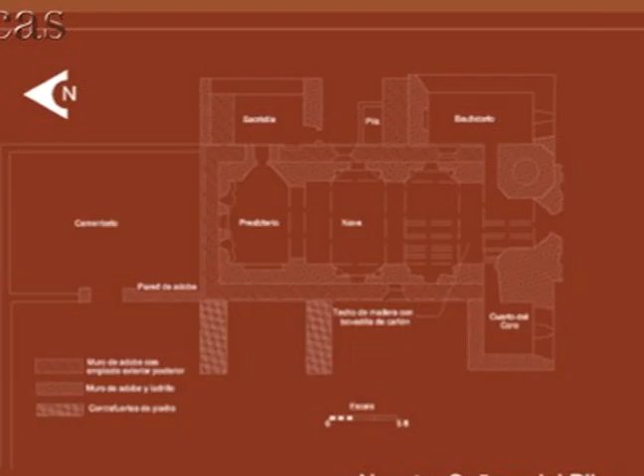Yo estuve leyendo mucho los informes de Jake Ivey en sus dos ediciones. La primera tenía una idea más o menos de lo que era la iglesia, de donde salió el dibujo que estábamos viendo anteriormente, y después la segunda versión que él me dio para que yo fuera viendo las etapas que habían identificado en campo ellos.

And so Abby took a good look at the work that Jake Ivey had been doing in order to understand how the building had different phases, looking at the work he had done on how the temple was in one moment.

Esto es un detalle del sistema constructivo que se hizo en la expedición de 1934, y nosotros lo cotejamos con las fotografías que obtuvimos del WAC, también en Tucson. Pudimos determinar el sistema constructivo, cómo está hecho con esta bóveda falsa y los vestigios que todavía teníamos en las fotografías. And so you can see here, this is the small diagram made by that expedition in the 30s by the National Park Service.

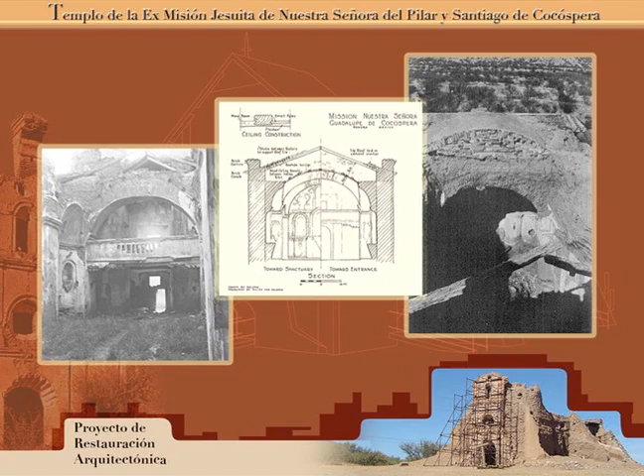And you can see the adobe arch and also the wooden beams. They tell us the size of the beams, and that kind of corroborated this idea of the false vault, barrel vault. And in the early pictures, this is the 1920s pictures, you could still see the wooden beams that held the carrizo, the cane sticks, and then the plaster that would come under it.

Después nos encontramos algunos dibujos de personas que estuvieron visitando Sonora cuando empezó todo este movimiento de Cocóspera, que al principio de los 70 fue muy importante, y algunas reconstrucciones que estos arquitectos hicieron. También estuvimos analizando los dibujos que se habían presentado de cómo podía haber sido la iglesia.

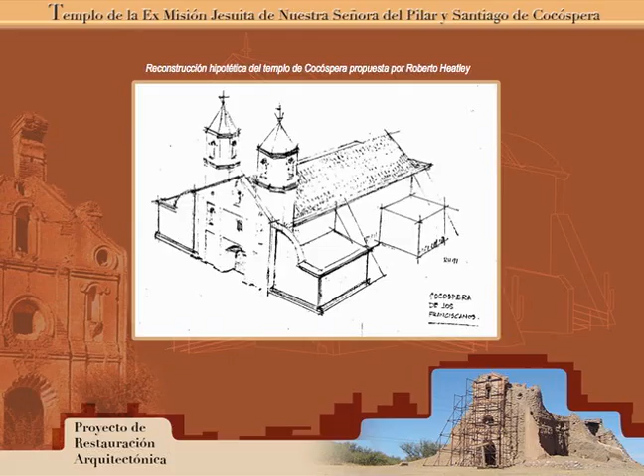We looked at different interpretations that have been made over Cocóspera. This is a small sketch made by Roberto Heatley, how he interprets Cocóspera could have been, let's say, in the late 1800s, beginning of the 1900s.

Bueno, y esto también era parte del trabajo de Jake. Entonces estamos viendo que el edificio, aún en su estado en ruinas, nos estaba arrojando información que a lo mejor teníamos una interpretación diferente, tanto Jake como nosotros, pero sí se aproxima mucho la interpretación que estamos haciendo de cómo podía haber sido la iglesia.

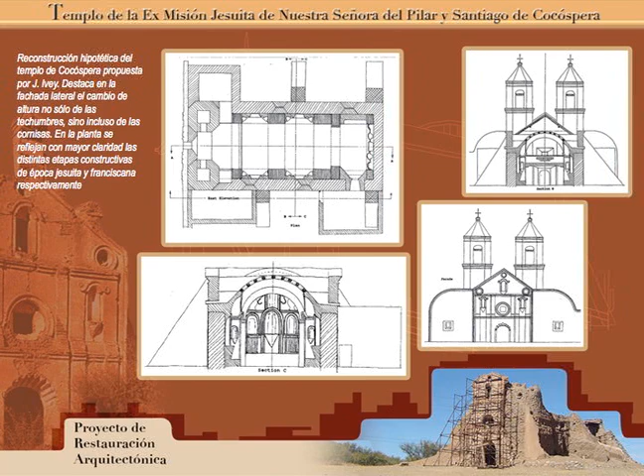Y estos son los dibujos de Jake. So these are the drawings that Ivey has made, and even though we have different interpretations, there are some common details, like the idea of the towers of the first part of the temple that has a gabled roof. This is basically the graphical reconstruction that Ivey has made.

Estos son el corte que plantea Jake con los diferentes niveles de los techos y cómo se vería una fachada lateral. These are the cross sections on one facade, and you can see the different heights of the rooftops, the gabled roof on the choir, this other barrel vault we can still see in the photographs, and the part of the nave. These are the sections of the adobe arches.

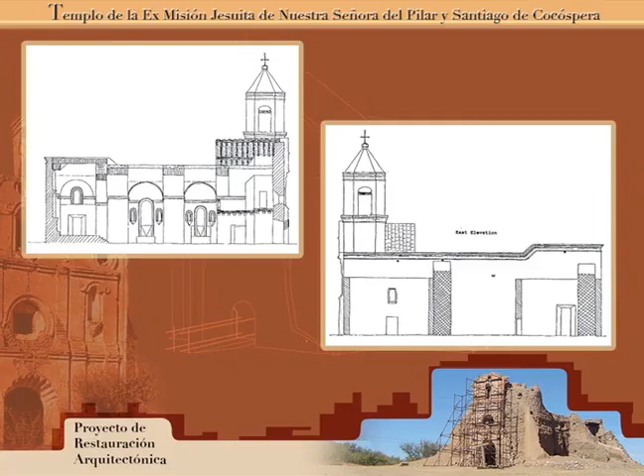Bueno, entonces nosotros también teníamos que, para poder hacer un proyecto de intervención, fundamentar muy bien por qué íbamos a realizar, cómo íbamos a realizar nuestro trabajo. Y lo que me tocó hacer a mí en campo junto con Júpiter y el equipo de arqueología fue hacer un levantamiento de lo que teníamos, de qué nos estaba quedando en la iglesia.

And so Abby had to do the documentation process. She, also with Jupiter, made the topographical survey, and they detailed the measurements of the building and all this. And so this interpretation that Abby and I made was done over the plans they made of Cocóspera, with the real measurements.

Nosotros fuimos a campo, estuvimos viendo dónde hay todavía arranques de columnas, dónde hay vestigios de viga, hasta dónde tenemos las alturas de los muros, dónde podemos ver todavía en el edificio algo que nos dijera cómo estábamos. Entonces, ya después con las medidas, empezamos a trabajar con esta reconstrucción con medidas ya tomadas en campo y un poco también apoyados con los dibujos de Jake.

With the information that we had from Ivey and the real plans made from the topographical survey, and looking at where the arches began, the vestiges that we had of the ruins, we still had the photographs and some of the elements still there—this barrel vault is still what we call the arranque, where it begins. So we had the measurements of many of these elements, and with that we made this graphical reconstruction.

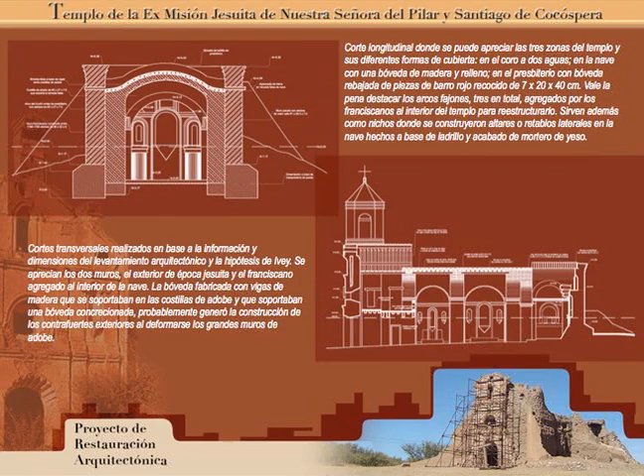Otra parte de la investigación que teníamos que hacer era saber exactamente qué se había propuesto antes, con qué nos estábamos enfrentando, qué había servido, qué no había servido, o qué ideas habían tenido y cuáles eran buenas y malas, y que podíamos adaptar a nuestro proyecto. And well, part of the investigation we made was to look at what had been done in these years.

There had already been different proposals for Cocospera. And well, we tried to analyze what was the good part, what could have been the bad part of these proposals. One of the criteria used is probably the idea to put a roof that does not touch the original structure, the idea being to protect this important ruin.

Una de las propuestas fue, dentro del Centro INAH Sonora se hicieron estas dos propuestas que vamos a ver adelante. La primera es esta, donde se proponía cubrir la ruina con una techumbre exenta, que se soportaría en lugares fuera de la iglesia, con la cubierta sobre los muros sin tocar la iglesia.

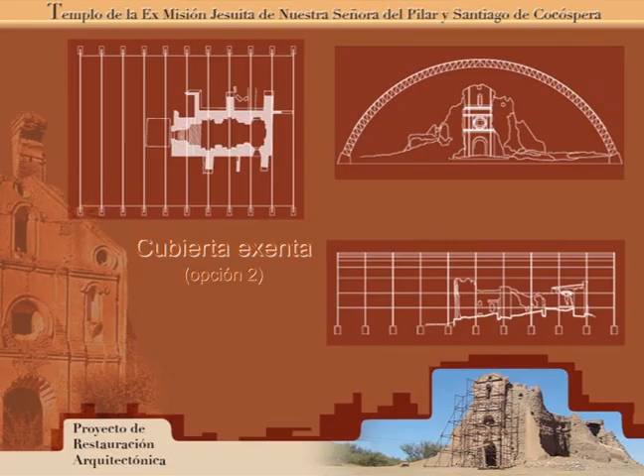Okay. Another proposal criteria was to make a bigger structure that would protect better the ruins of the mission, that would go all the way down this way, so it would protect it in a better way. But still, of course, we're talking about a great big barrel that also has an important impact on the landscape, and still, neither one was talking about what we were going to do with Cocospera on the inside.

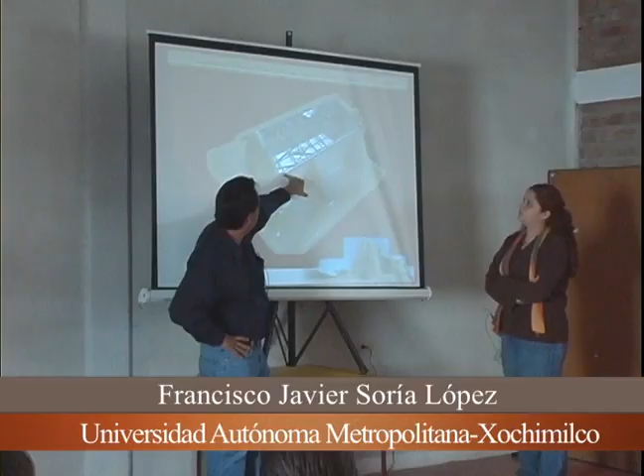The difference with, I insist, the previous proposal that also wanted to put the structure to work is that it was more in a reconstructive criteria. The shelter is resting on the buttresses? Okay. That's something we weren't able to know. Jim was telling us that the idea was that the structure would rest on the buttresses. On the buttresses. Buttresses, sorry.

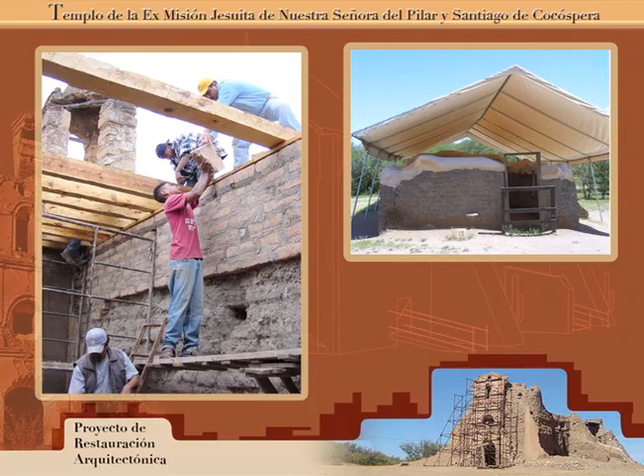The deteriorating process in putting some kind of cover that doesn't close off all the elements is not a definite proposal. It helps, even though I must say it does help. So the idea is to use this criteria.

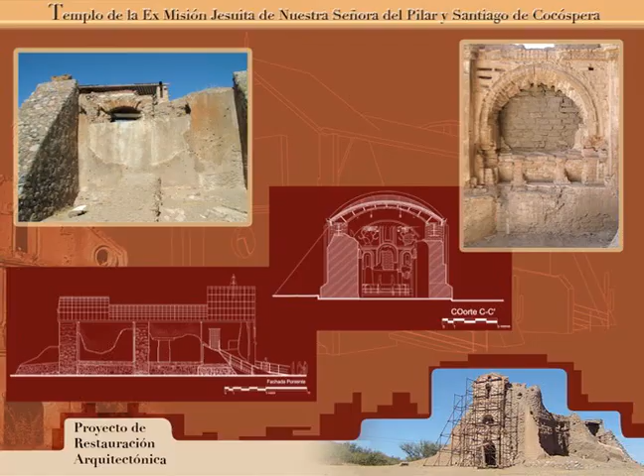We cannot do it with the textures as they do it with the brick, because all the adobe surfaces must be plastered on the outside. But the idea is to leave the silhouette of the ruin that we found. If this is done, we would put back maybe an inch, an inch and a half, the new wall and the new mortar, so it can clearly be distinguished.

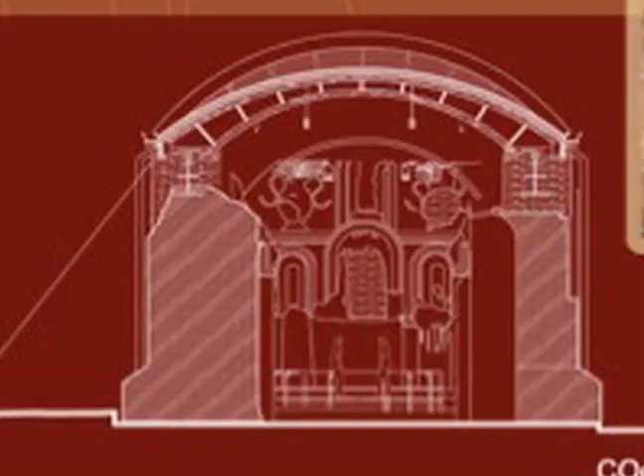We are not in favor of this, in my opinion, even though it's a solution that can be explored again, since it doesn't cover all the elements. Although this proposal, the exposed roof, could be explored again, we believe it doesn't stop the deterioration process definitively.

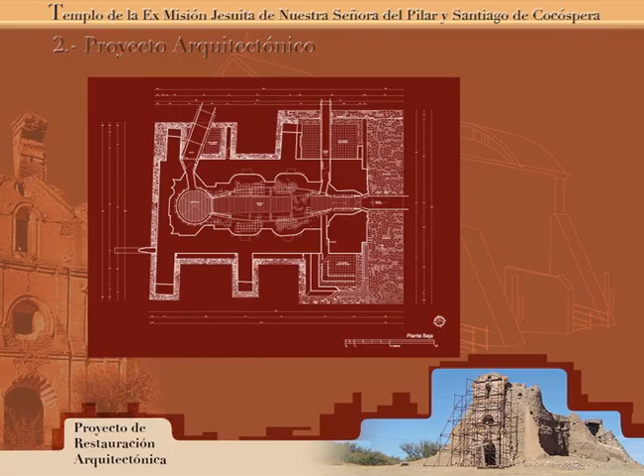So going down to the project, the idea is to have an aisle that you will come into the structure through. You're not going to touch the original floors.

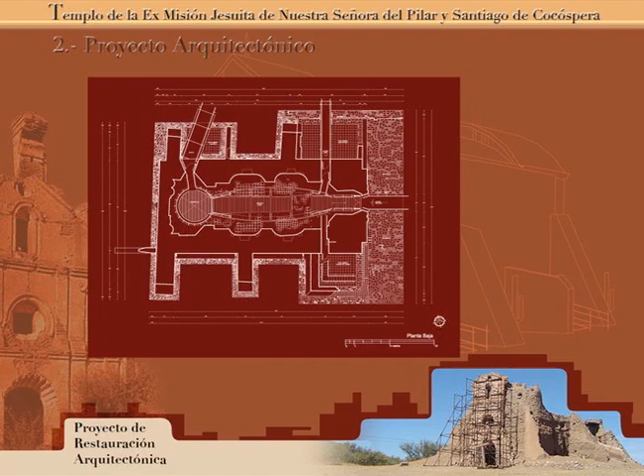So this is an aisle that has three parts: the entrance, and it's a bit wider at the center with a small curve that has a little bench on it, so you can sit and look at the altars. This circular part lets you look at all the lateral altars without being able to touch them.

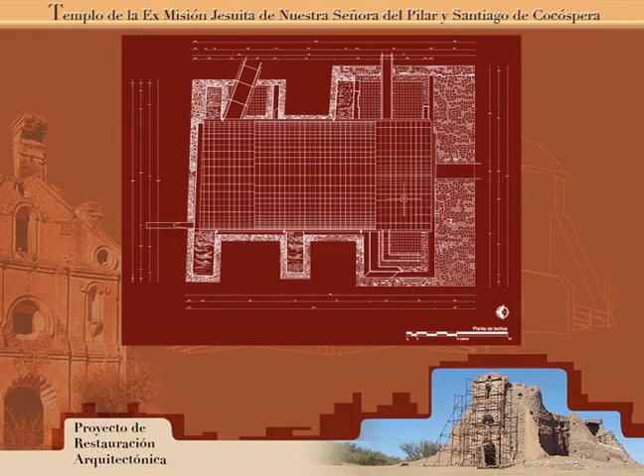Well, these are the roofs. We're recuperating this idea of the three levels.

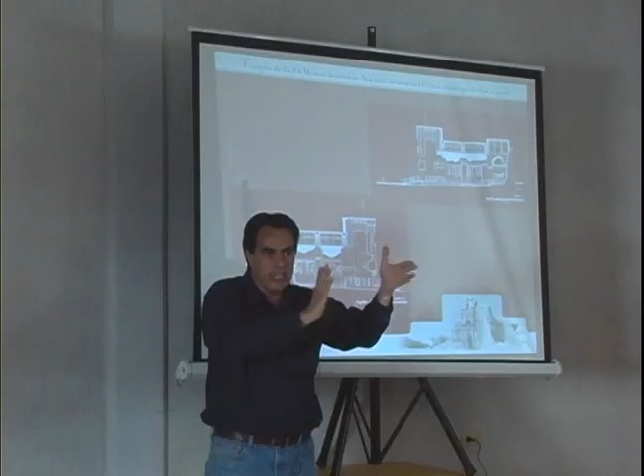It's still 160 centimeters—that's about 8 feet? No, that's about 6 feet. Okay, so there are two proposals for this.

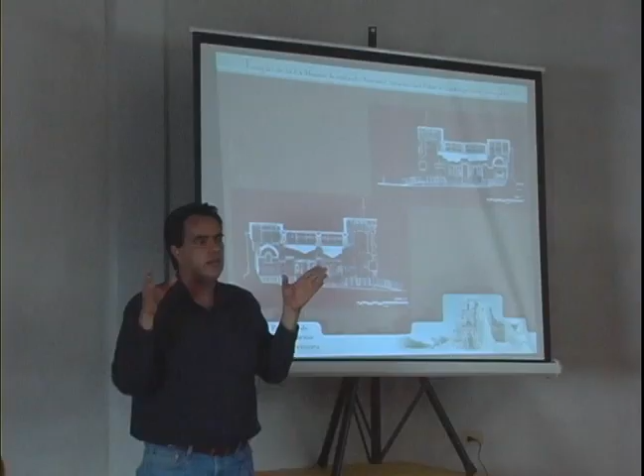Remember there were two walls. The Jesuit wall is on a better foundation than the Franciscan wall, but we're still putting weight on both walls, though we're not covering the whole Franciscan wall for various reasons. The lateral altars have been lost, and we're going to leave them in a ruinous state—making no reconstruction on the inside, only consolidation.

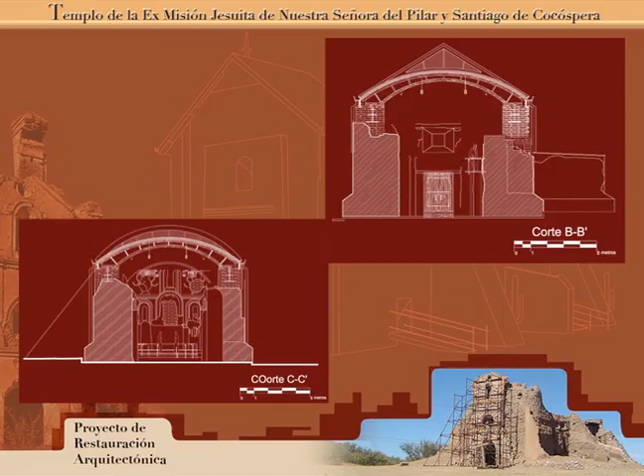I was forgetting to say, this is a wooden truss. All the roof is made with wood. Next. Well, this would be the detail.

A very important thing for us was that the roof should be designed so that in case some of these elements would fail, even though we're not going to make a bigger overhang, we do think the gutter must overhang in case we have some faults. One of the problems with Cocospera is that it's in the middle of the desert. There hasn't been all that maintenance, even though the INAH has made a great effort. The truth is we have to think of a definite solution that will require very little maintenance.

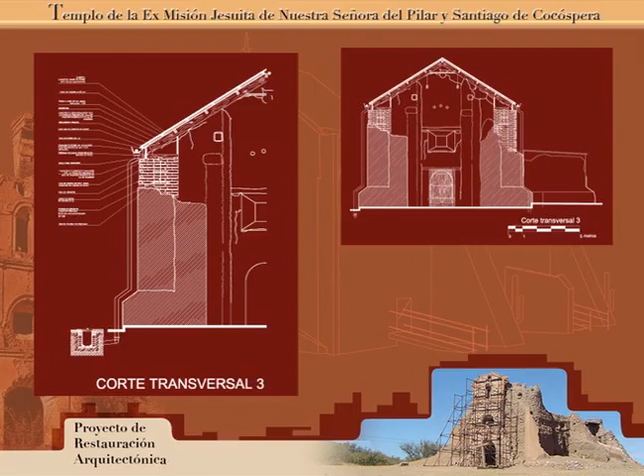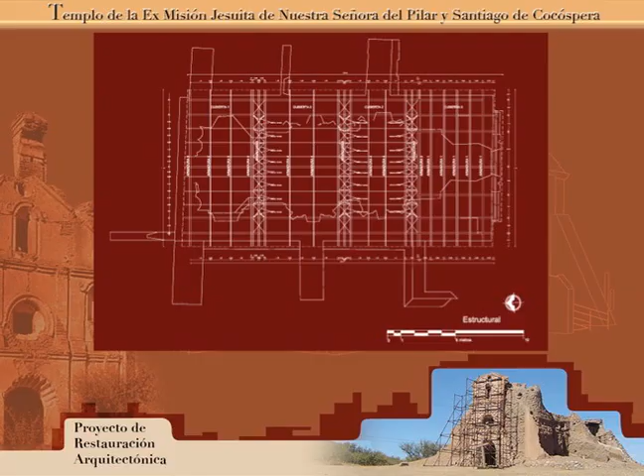This is the general structure. You can see the main trusses that coincide, not with the buttresses, but with the original places where the arches went. Here you can see better how the main trusses align exactly with the points where the original adobe arches were. Next.

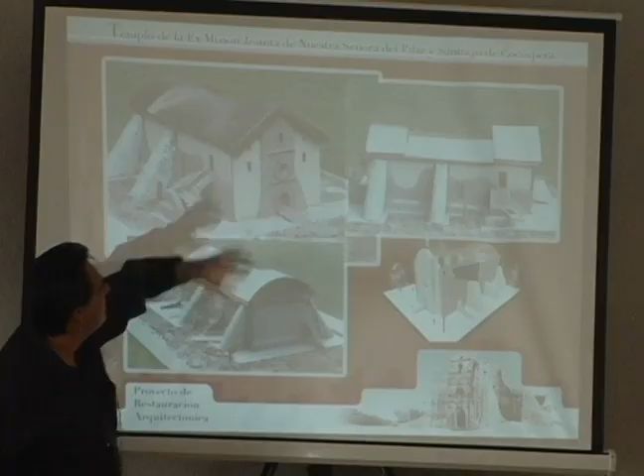This is a small model we made that gives you a better idea. It's not as thick as in the model, but it does give us an idea. The idea is to make a difference between these two.

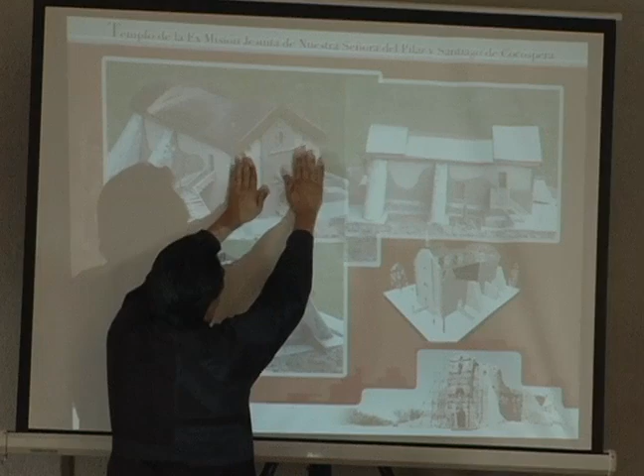I forgot to say that we're also going to replace, and this is the other part that's going to be difficult, the two side facades only in their silhouette. The idea is to sustain the central body. The other part, which we haven't totally decided, we wanted some kind of rods, because our first idea was to put in some kind of link, an intertoothing, something like an intertooth with the brick and the adobe. It might be very invasive because of the size, so we were thinking maybe of some kind of fiber rods that could have lime mortar or something that would help.

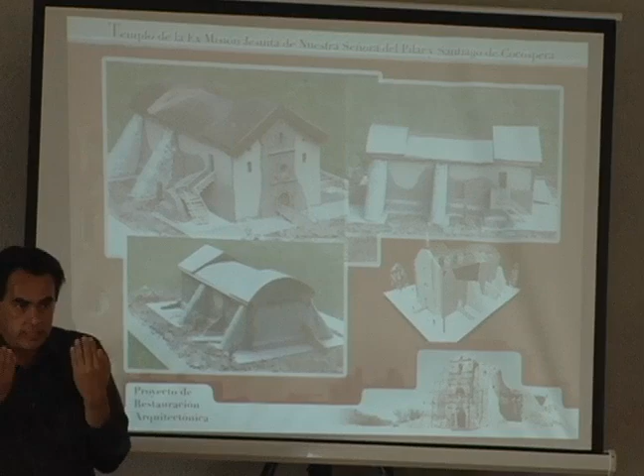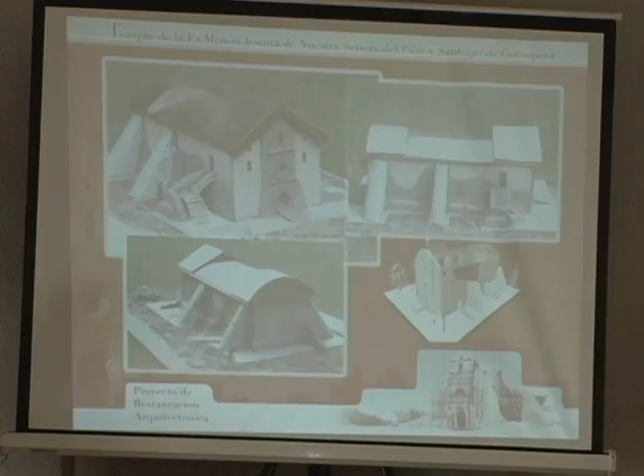Next. Well, one thing that's very important, the idea is that the final finish is a copper roof. Why a copper roof? Many reasons, which I think are important to mention. The first is that we need a long-lasting material. If the job is done, I hope we can get someone in Mexico who can do this job really well.

The problem with tiles, with barro, is that it breaks quite easily, and we need something that will last.

Churches were covered with copper, and sometimes we have churches over 200 years old that still don't need maintenance. Even though you see it here nice and shiny, remember that copper oxidizes in a greenish way, so the idea is that this will meld into the general landscape and won't be that brilliant.

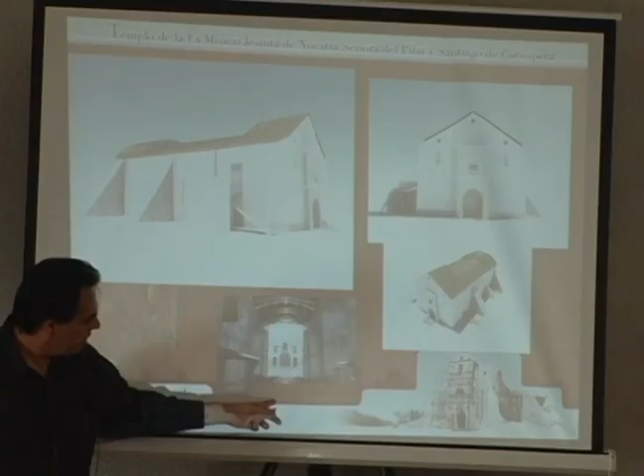The idea is that the project covers and protects the inside. You can see the aisle, and a bit of the light - we would have a little more light in the part of the altar because of the difference in height.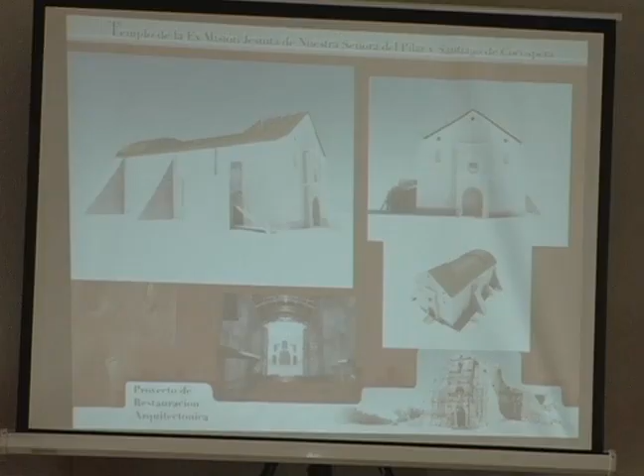I would finally say that the copper is important because 30 kilometers from Cocóspera is Cananea, the main copper mine in Mexico, and in Latin America just after the Chilean mines. So we're trying to involve someone who might be able to sponsor or finance the project, especially because of its symbolic power. Copper was usually used for important buildings like churches, but this also has to do with the 20th century reality of our most important copper mine, and we would like to involve the people in this. So this is the general idea.

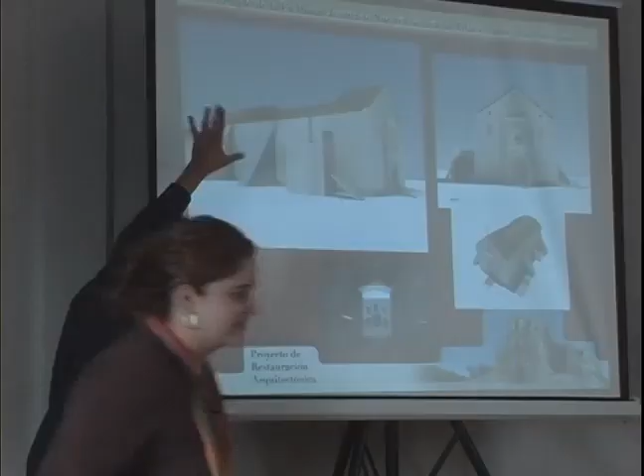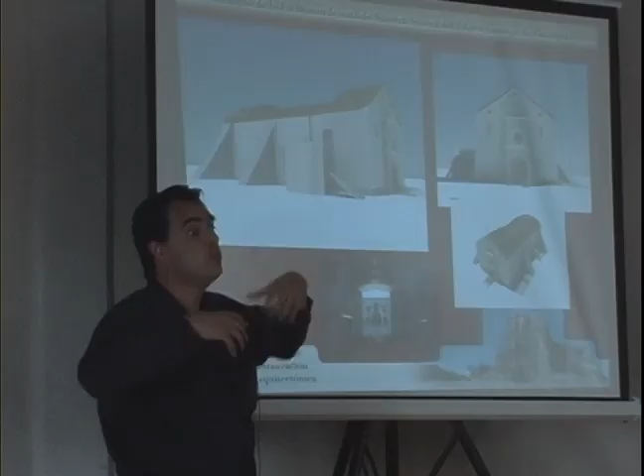Another thing they commented in Mexico is why not insinuate a bit better the bell towers. I said no, absolutely no reconstruction. There has to be a site museum that gives you all the information of how it is. So that's it.